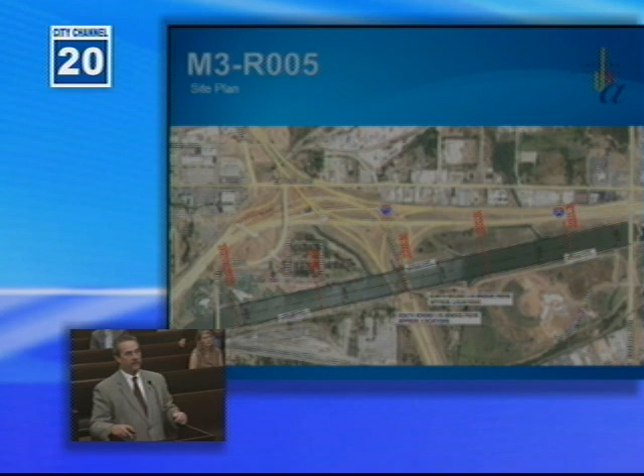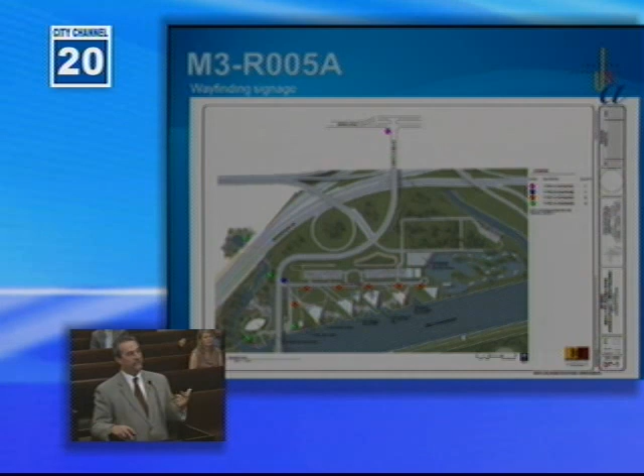This is the master sign layout sheet. The various colors depict various types of signs. The red dots along 6th Street are generally the enclosures for the OG&E transformers. The purple signs are the major entry signs, one at Lincoln and one at 6th and Lincoln.

Signage—this is the schematic of the signs. These will all be backlit, and the ribs you see there will be a blue backlit image, so we believe they'll be very attractive. At the request of the operators down there, we also added one more sign type, for an interchangeable map like you see at the zoo, so people walking around can see a map showing where they are.

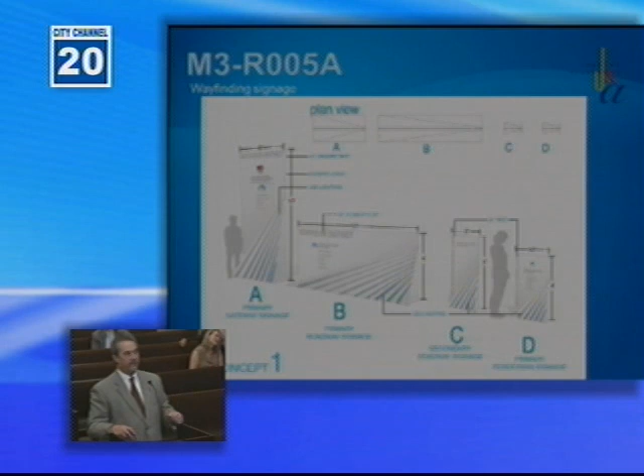This shows the five transformer locations. It's hard to see on that image, but here's the 3D rendering showing what they'll look like. These enclosures you see—the boxes with the fellow standing next to them with his hands in his pockets for scale—are what end up being the sign, labeled with the various things we're trying to point out.

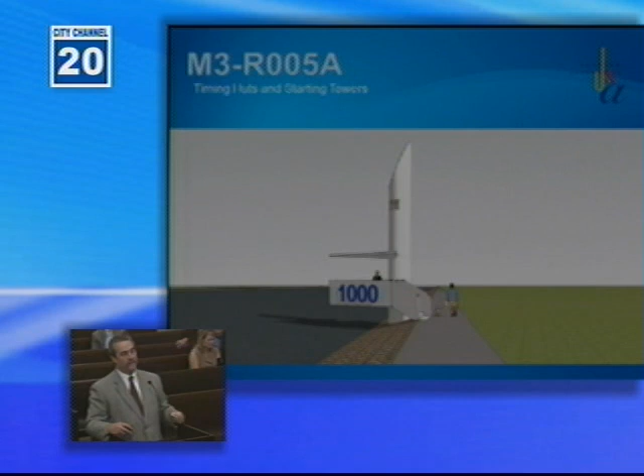This is an example of the tower. The color of the letters and the color of the tower will be as shown here. We're pushing them out to the edge of the riprap, right at the top edge. On the south side, we're allowing about an 8 to 12 foot clear space so that at some point a path could go through here for coaches to ride their bikes or golf carts to coach their team during training.

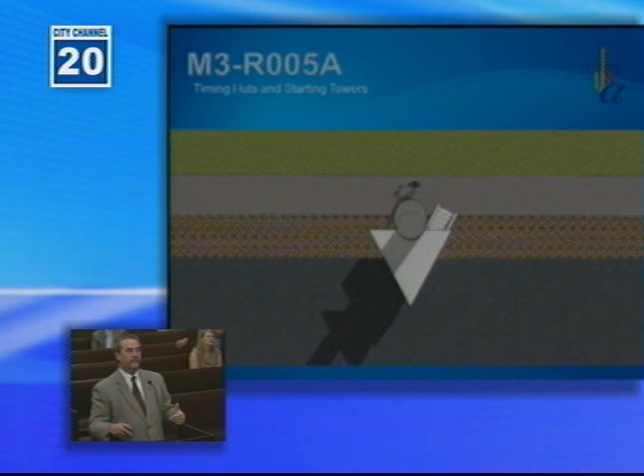Here's a plan view. You can see how close we are to the top of the riprap, and the judge, as he stands on the platform, will actually be over the water, having a clear view of the boat competitors.

And there's another isometric view. The items included inside this enclosure are demountable—just a table. We're providing plugs for some ambient lighting and for their computers to plug in, and computer connections back to the finish line tower.

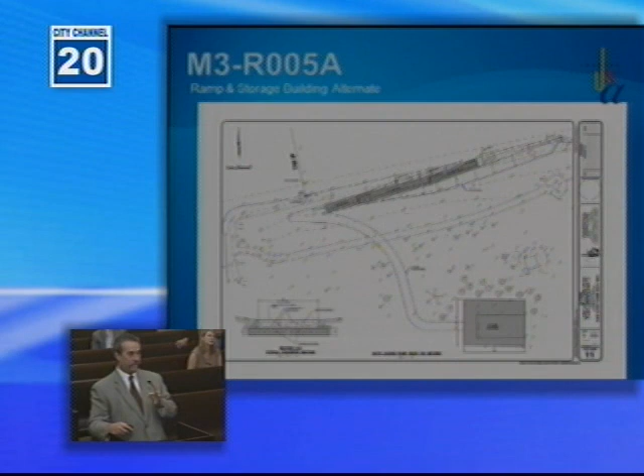The ramp, as I mentioned, this image shows both the ramp and storage building. The bottom right of that picture shows the fenced-in area that exists now, which is what they're storing their stuff in. It's surrounded by trees—you can barely see where they are—so we anticipate this building will blend in as well. We've gone to the Scenic River Overlay. They've approved the building, they've approved our towers, and we're ready to go forward with this project.

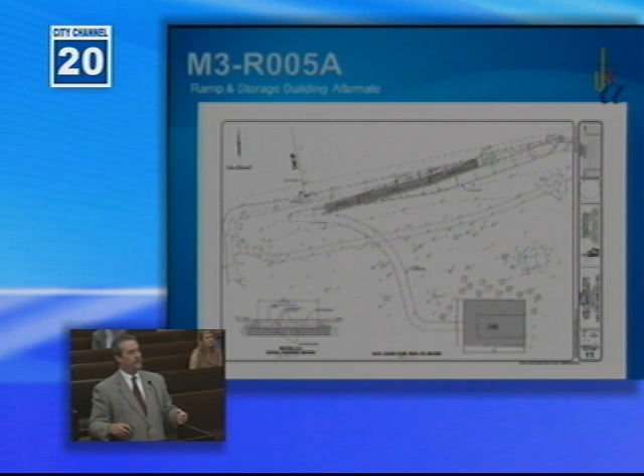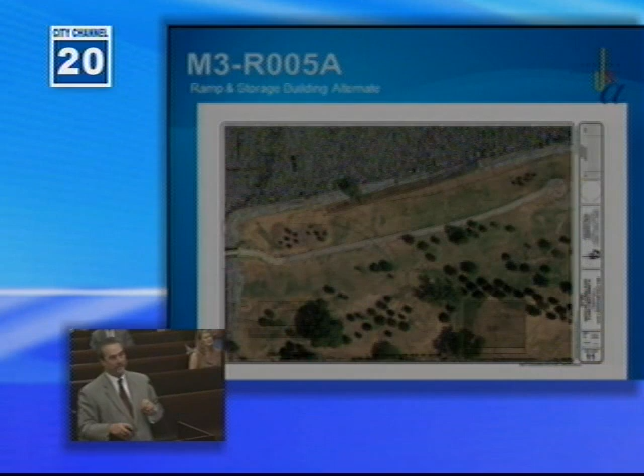The ramp, as I mentioned, is very long and runs parallel to the edge of the waterway to allow that slope to be gentle as it goes down, and be fairly uniform for the easy assembly and installation of the starting gates. This is just an aerial view to show how much screening we already have naturally in place, and we intend to keep all that so the building will be tucked behind those trees.

And then finally, our budget—the first two items are items we've actually procured or have under procurement. The docks and the starting systems are in place. The rest of the items have been adjusted accordingly to current estimates as we finish the plans up. So we believe that even with the 5% contingency, we're within budget. We still anticipate some savings in a couple of these items that will hopefully help pay for at least the building we need so desperately down there.

And with that, I'll be happy to answer any questions. Do we have any questions, or any questions from the audience?

Okay, our committees worked very hard on this. We're very grateful to you. I think this is a good plan, and I'd like to call for approval. I move that we approve the resolution. Is there a second? All in favor? Opposed? Resolution is approved. Thank you, Tim.

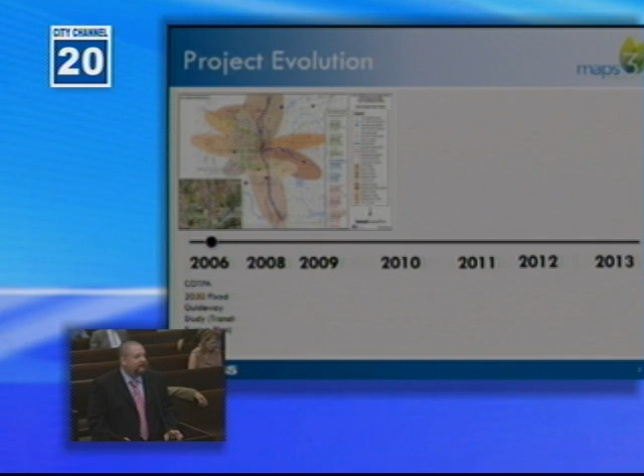Back in 2006, this all started with the approval of the fixed guideway study, done through COTPA, which was the 30-year transit plan for Oklahoma City and the metropolitan area. The plan recommended a series of transit alternatives, including bus rapid transit, commuter rail, enhanced bus, and a downtown streetcar circulator.

In 2008, COTPA began the alternatives analysis with Let's Talk Transit. This was a series of 7 public meetings that had about 300 participants and 1,100 online and in-person comments received from the public meetings.

In 2009, the MAPS 3 election was approved. It was streetcar being on that election.

In 2010, COTPA received the Tiger II planning grant, which helped look at items such as a health impact assessment, livability principles, and visualizations on the proposed streetcar, and that study is currently ongoing.

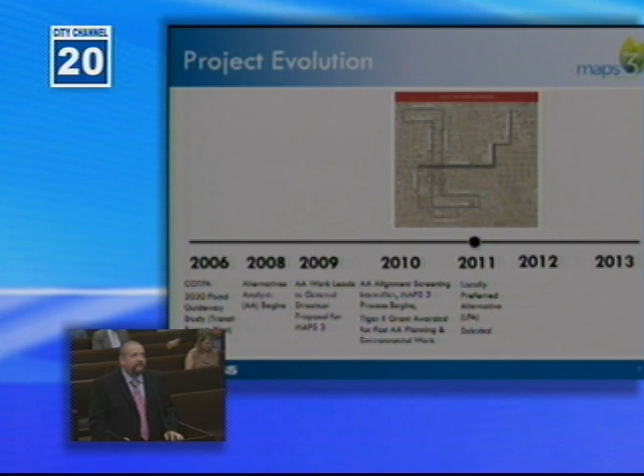2011, the alternatives analysis wrapped up with approval of the locally preferred alternative. Many of you have seen this. It consisted of 2 routes, one out to the Health Science Center and a core route from Midtown to downtown and Bricktown.

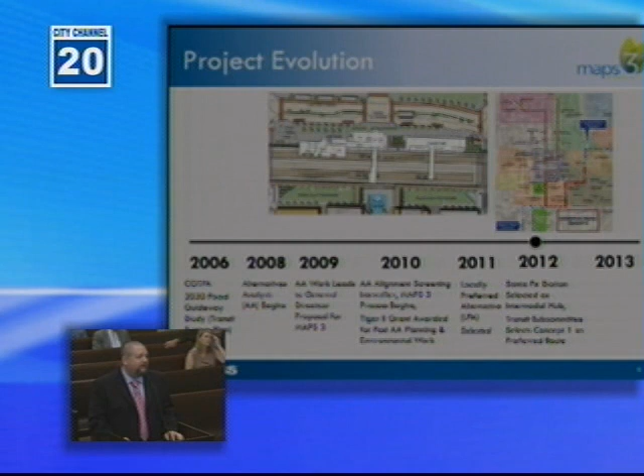In 2012, we had the introduction of the completion of the study of the intermodal hub study, which recommended Santa Fe Station as the site for the intermodal hub. Also, the MAPS Streetcar Subcommittee recommended Concept 1 as their preferred route.

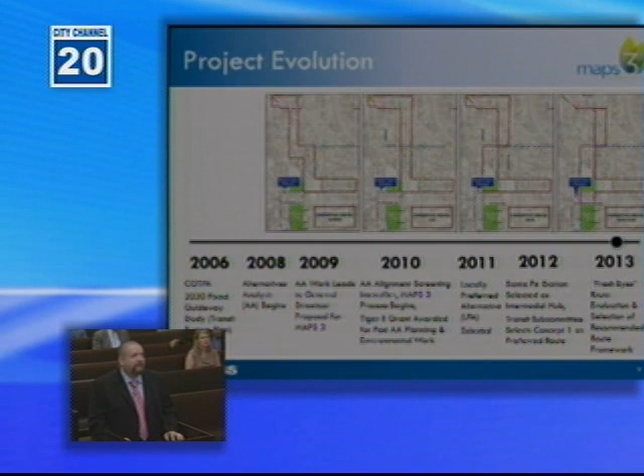So here we are today. Beginning of 2013, we began a fresh eyes route evaluation, and today we're presenting you the selection of the recommended route framework. Our evaluation, as I just mentioned, started off with the locally preferred alternative in Concept 1.

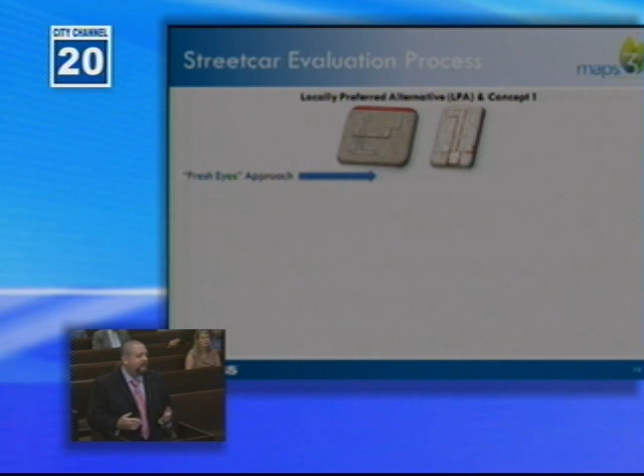Then we conducted a fresh eyes look. We looked at downtown, we looked at many possible route alternatives within downtown, and came up with 8 potential route options. From those 8 route options, we conducted our evaluation and came up with 4 conceptual route options as our short list. We presented that a couple months ago.

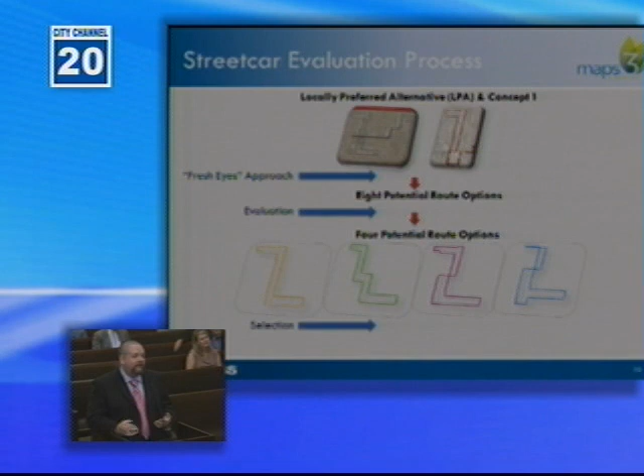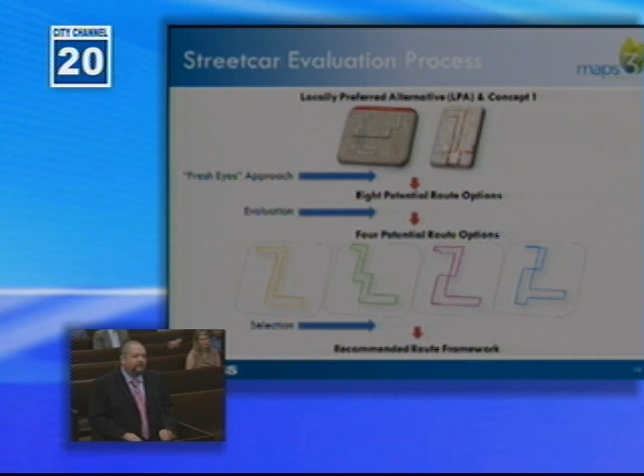In this past 2 months, we've had another second Fresh Eyes workshop. We've had a public meeting and also input from our subcommittee, and we refined our evaluation to get to today where we have our recommended route framework. And I'll turn it over to Mark.

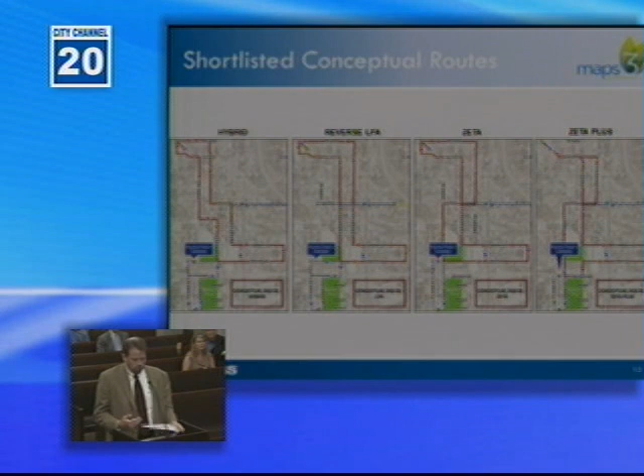But then we had the Zeta, which combined the benefits of connecting to the transit center and serving Automobile Alley, as well as serving the heart of Midtown. And through that initial review, we identified the Zeta Plus, which raised questions of how important it was to serve MAPS Park during that first phase. So those were the 4 candidates that we took to the second level of screening.

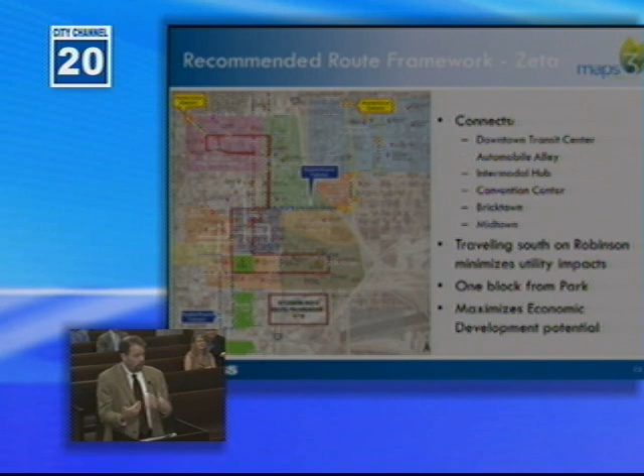What came out is what we call our framework to continue into project development. It is the Zeta route, and essentially the reasons are because we are making the best connections—it is the route that best connects all the major destinations, including the downtown transit center, Automobile Alley, the intermodal hub, and some of the MAPS projects as well.

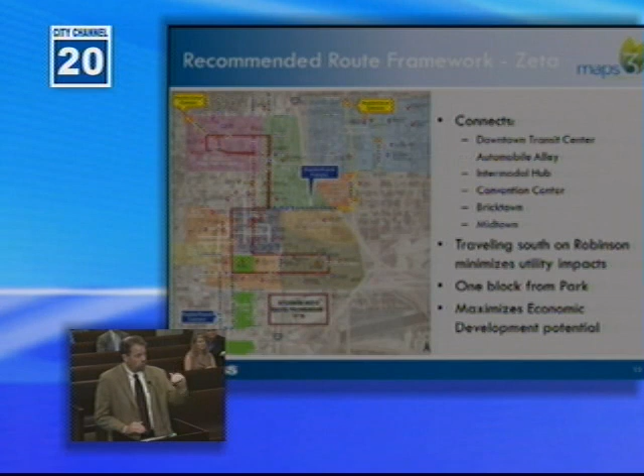Traveling southbound on Robinson in the core of downtown, between 4th Street and Sheridan, that's where all the Tri-Gen facilities are. If we're traveling southbound, we'll be able to avoid those impacts.

We're one block away from the park. We feel that is sufficient for phase 1, knowing that phase 2 can complete that connection. There's also an added benefit that with the Zeta, we don't surround the convention center site, which would add complexity to its construction.

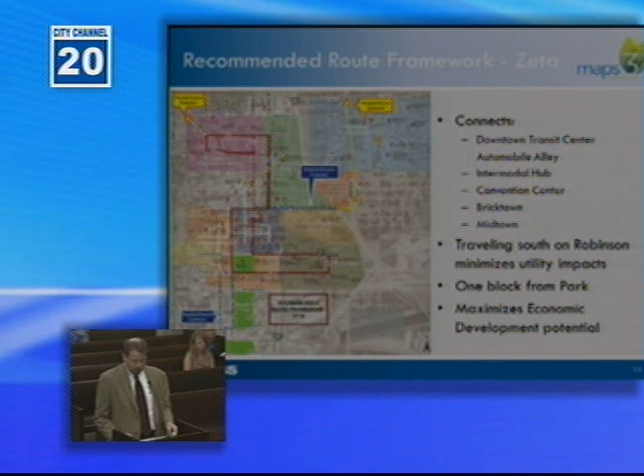Because we're serving Automobile Alley and Midtown, we're really maximizing the ability to catalyze development. So the alignment is 4.5 miles of single track.

Right now we didn't do detailed cost estimates, but we projected using the work done before on the alternatives analysis to make sure we're in the range, and we're projecting a cost of $99 to $109 million. But I've built 12 of these projects, and we're committed to meet that $94 million phase 1 budget. We have a lot of tricks up our sleeves, a lot of lessons learned that we think we can accomplish that for you.

We call this a framework because we're not quite done with the alignment selection. There's a couple of options that we're carrying forward that we will study in the next phase of analysis. Essentially, in the Midtown area.

South of Midtown, the alignment is pretty set according to our recommendation. That will be southbound on Robinson, turning into Bricktown on Sheridan, then wrapping around and coming westbound on Reno, heading north on Hudson, serving the transit center, and then cutting to the east back to serve Midtown.

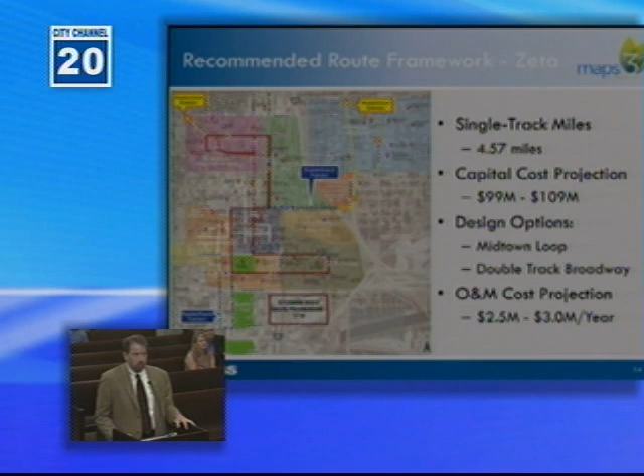Lee, you want to talk about the maintenance facility? So in conjunction with studying the route alternatives, we also looked at potential areas for the maintenance facility.

Some of the criteria we used to evaluate maintenance facility sites: we looked at the alignment, how the site relates to it, the distance of track needed to build from the end of the line to the maintenance facility, traffic impacts, and how the location supports future route extensions.

We want to make sure the facility can accommodate not only what we're planning in phase 1, but also phase 2 and possibly future extensions down the road.

Urban adaptability: how does the site fit into the urban context, the existing land use there today, and how does it fit with the zoning requirements?

Also look at any cultural and historical impacts and try to avoid those with the site of the maintenance facility, and also real estate—make sure there's no displacement of businesses or residents, and that the site does support economic development.

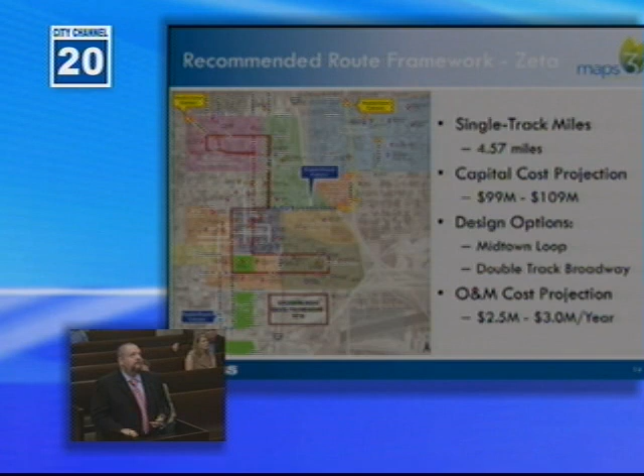So we have narrowed down our sites. We have 4 potential areas for the maintenance facility.

Two are located in Bricktown, north of, between the rail line and the parking lot just north of ACOG and the Bricktown Police Station. There's a site east of Mickey Mantle and a site west of Mickey Mantle.

A third site is just east of Lincoln, between Lincoln and 235. And then our 4th site is down south by Dexter Union Station, which could be accommodated and definitely fits into the future extension of the park.

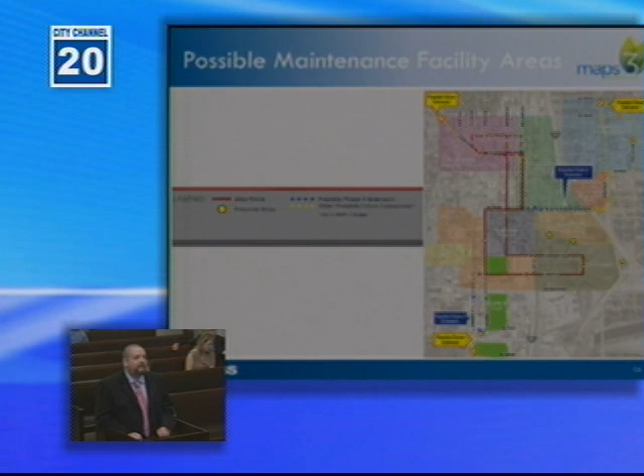So our next steps are to determine the vehicle propulsion, whether there's a lot of discussion of whether the vehicle needs to be completely off-wire or on-wire, off-wire. If it is, that's called a hybrid vehicle. So if it's a hybrid vehicle, where will those sections be where it's on-wire or off-wire?

We need to finalize the storage maintenance facility location and begin design of that facility, and also get into preliminary engineering, which includes looking at those design options, refining them, and coming up with the final route.

Then we get into rail and vehicle procurement and develop an economic development plan for the corridor. Once we have the preferred route, we develop an economic development plan for how the city can entice and spur economic development, and then get into Phase 2 route planning to see where that second phase is going to go.

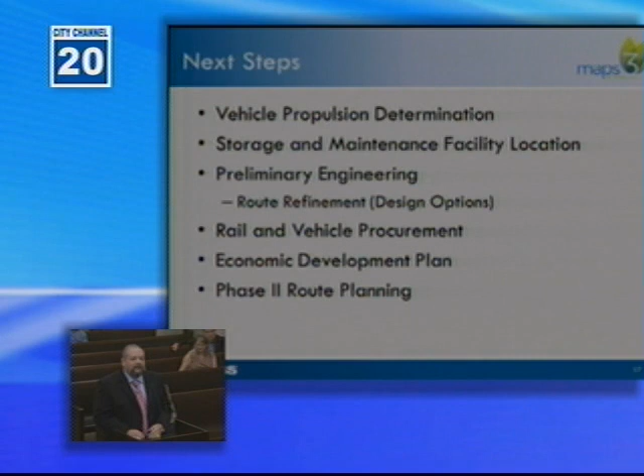So with that, we'll be glad to answer any questions you may have.

Thank you, Lee, that was great. And so our subcommittee voted on this yesterday, and we were unanimous in moving forward with that Zeta plan with further investigation.

Double tracking Broadway, or tail track in Midtown. So we're very pleased with it, and actually one of our committee members, Jeff Bezdek, with some help, made a video showing what the route looks like from the passenger's perspective.

He put a camera on his car and literally drove the route at the speed the streetcar would go. And I gotta say, it's really cool, it'll give you goosebumps, so I'm excited for when that comes out.

It's pretty amazing how much area that covers. When you look at it on a map, it's like 4 inches tall, but when you actually get on the route and cover that distance, it covers a lot of area. And then you see the areas it passes by and serves.

It serves the transit center, which is really important. It serves a lot of development that's happening or being contemplated right along that corridor, and it touches a lot of places that people want to be, a lot of hot spots. But also there's still lots available for development that could further densify that area.

So we were really pleased with the work that was done, and very confident it'll be something we can be proud of moving forward. Thank you very much, both of you, for your great report.

We have the River Trails project. This is the one that goes from Council to Meridian, and you can see the process here. We have some property acquired. There's some significant city property there around Crystal Lake, and you can see the status of the other property. So staff's working really hard to try and acquire this property. It's just a long process.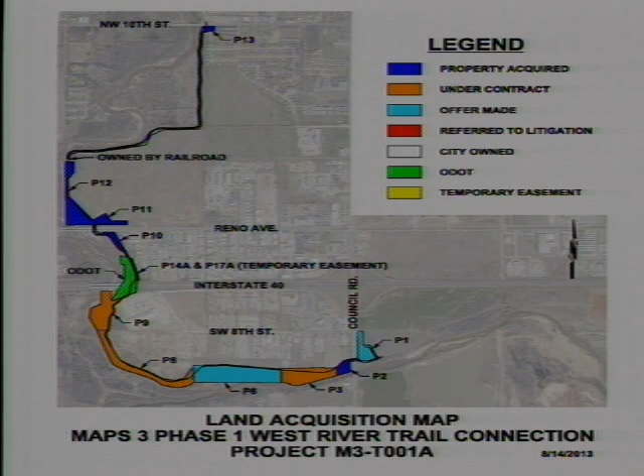Is the parcel there with ODOT an actual purchase, or is that going to be a trade? That will be an easement. It's ODOT property, and we're getting an easement through there to put the trail.

Okay, and David, now an update status of MAPS 3 programs. Thank you, Madam Vice Chairman, I'll hit a few highlights. As we know, the river course lighting was completed. The windscreen is in design at the river. The Whitewater facility is in design. And you saw today the Phase 2 improvements. So there's a lot of work being done at the river.

As Mr. Dover said, Senior Wellness did not meet this month, but the negotiations have just begun. Council has authorized us to negotiate with 3 of those operating partners. Trails and sidewalks, we have Project 1 and 2 of Phase 1 underway, and we just went over the Phase 1 trails. Convention Center conceptual design continues on that. Mr. Nealon did a good job on the fairgrounds, he covered everything I had. And we saw the streetcar route framework today, and work continues on that. Just because we have that route framework, the work has just begun. And as Ms. Lowe said, the design on the master plan continues for the park.

So it's a very busy time. Busy, busy time. Do we have any comments by board, staff, citizens? Anyone?

Okay, well, my compliments to the staff that keeps us going and keeps us in line. I appreciate your work and the work of everyone on all the committees, because it is a commitment, and we do appreciate that very much.